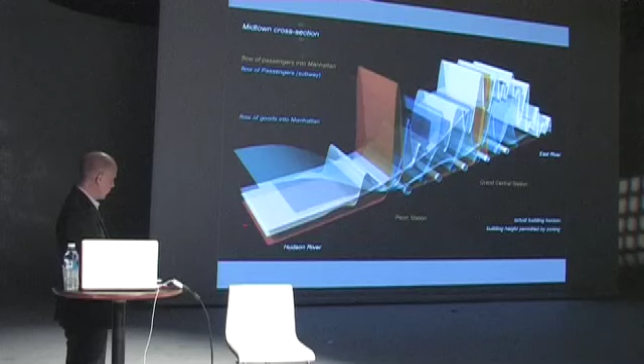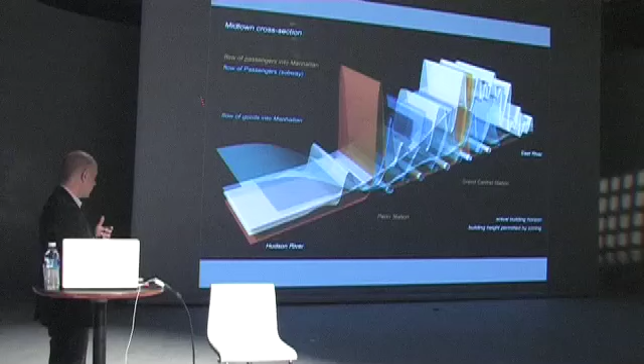Today these piers are not there anymore, and we know that if you are looking at an area we have looked at ourselves, that is the Penn Station area and the Grand Central Station area, and then think about the connections between the city center and the relationship towards the river, then there are many problems today. I mean, many things that are now an obstacle in the city. Although maybe there is a wonderful garden, a park around the river right now, and it's actually healing itself up since the industrial era.

But still, for instance, when you think about the 100,000 people coming into Penn Station every day, and, for instance, in the night you want to go to Madison Square Garden, then it's boring when you come out of that building. It's not so lively. If you think of that in relation to Grand Central Station, then this is a far more integral site with much more programs and much more activities around this site.

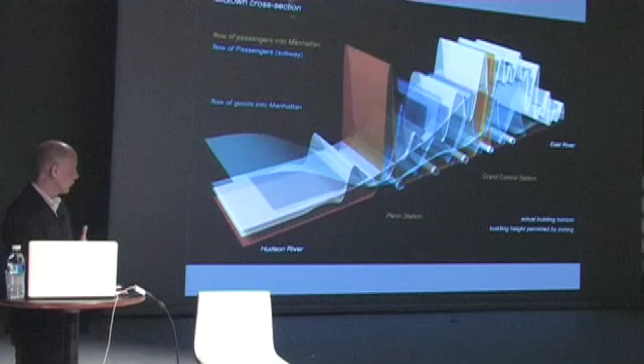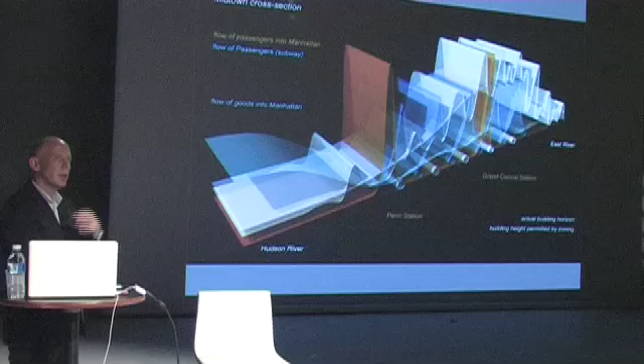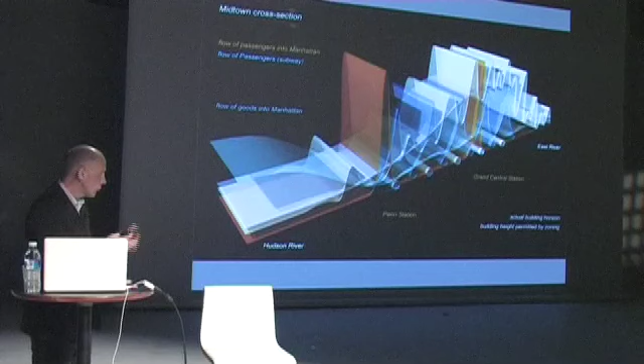But here, I'm not going to explain how we analyze this part of the city, as I promised. But I'd like to talk about how you can visualize information, how you can today structure information, and how you can rethink organizational principles. The organizational principle of Manhattan is a typical industrial, mechanical, organizational model, related to a history of architecture and urban planning that we have known for a long time. We know how we can work with the grid.

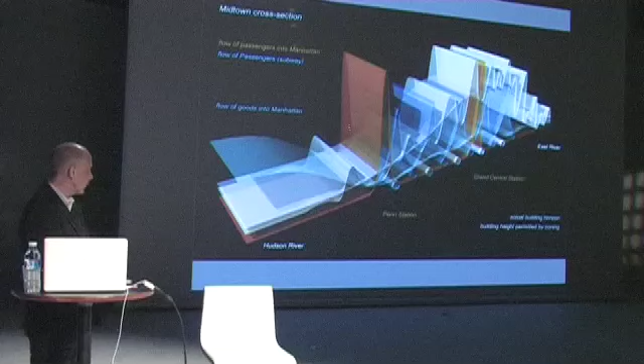So what is essential today is, what are the types of organizations we can work with today? What does it say to us when we see this type of information, and what can we do to it in a way that we can restructure it and redefine it in order to make this site more interesting, for instance.

Anyway, we have been for many years activating ourselves towards the idea of the parametric, although we have already been working on the parametric design method for maybe close to 10 years or even longer, but what we have learned is that it is not so important to work only with the computer when it comes down to form making alone. And the parametric principles in design are not so fascinating where they are related to just producing forms alone.

That's what I'm saying. We are saying with UNStudio that if you look at how you bring information together, then it's most important that you do that in a way whereby you make sure that the information is crossed and combined, and that you can suddenly discover things in how you combine information so that you make it more compact.

For instance, here on the site we were looking at the residents, the commuters, the tourists, and of course the people who really go to work at the location. How is it related to accessibility and publicness? How do all these user groups occupy the site in time? And not only in time in the day, but also how they walk from one location to the other, how much time does it take? Also, we looked at all these user groups in relation to their infrastructure. What type of infrastructure do they use?

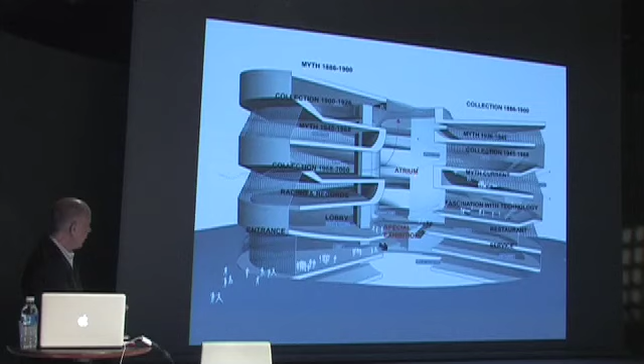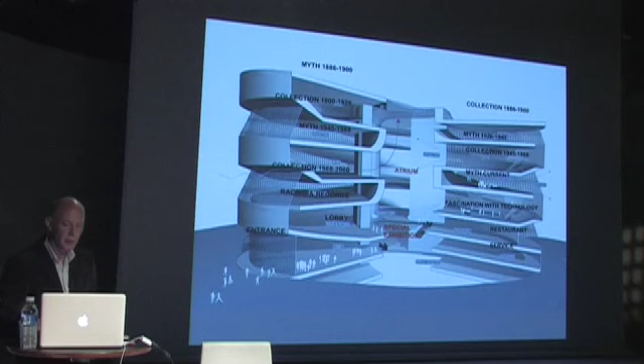And as you can see, the integral quality of the floor, held by the twist, is carrying the other floor, picking up in this layer again, and then carrying the next floor. So this idea of the continuous surface as an integral spatial organization, whereby the program, the infrastructure, and the installations are all integrated into one hybrid, seamless organization.

But as we know in architecture today, it is not so interesting anymore to make complex forms. As I said, it's not a form. It is the way you discipline the organizational qualities of how you bring the building together. Here you see the twist coming back four times in the organization, and we did that to be fast and quick on the one hand, because we had only one year to build this project, but also to make the building constructively very tight in the way we brought it together.

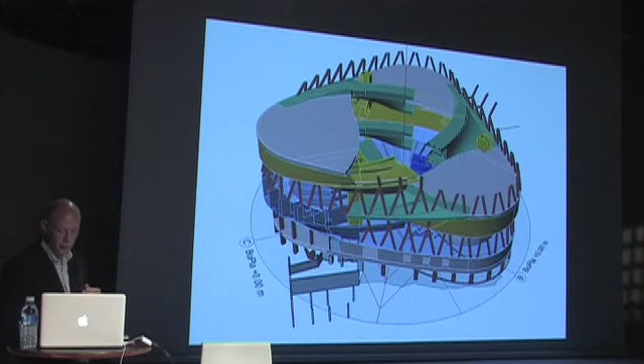So also for the casting techniques, we used similar materials to use the same method for the way how we then could speed up the project. So here you see again the internal view exhibitions like this, and these are the external views. So this is one spiral, and this is the other spiral.

And here you see the mathematical principle of the way how these twists are coming together. This is actually what we call a trefoil organization in mathematical principles, but the surfaces are called Seifert surfaces, and these Seifert surfaces are interesting to work with because they absorb an enormous amount of architectural qualities. So like I said, they can absorb the construction, they can absorb the way how you can direct the surface. So they talk in mathematics about orientable and non-orientable principles in these qualities of the way how this surface can guide you in the building.

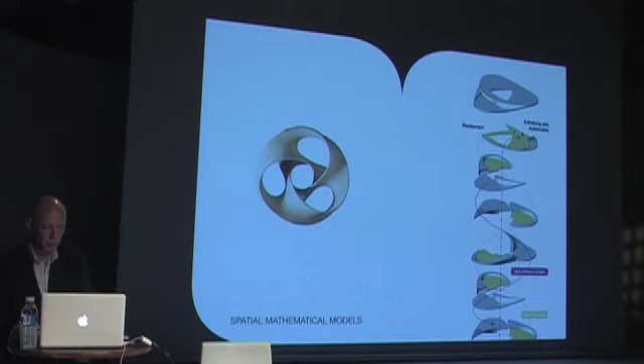One of the most important aspects when we designed this project in 2005 was that already in Germany there was an incredibly intense belief of the way how we had to think about the sustainable, or what we like to call the attainable aspects of the building. This is a smoke detector, so if there is a fire in the building, then this smoke detector can suck out the smoke in close to 5 to 10 minutes out of the building.

So that means that whenever you have a fire, you don't really have to have any compartmentalization within the building, but you can suck the smoke out of the building in a tornado-like way, because it twists itself up the building and then it sucks itself out of the building. So this is a real technological intervention in the way how we could make the building as open as possible.

And the advantage of this was that it could produce a building with 15% less materials. So we didn't have to do all the glass walls in the building for each floor. We didn't have to do all the compartmentalizations, not only between the exhibition spaces, but also between the utility spaces.

So also with this we could introduce not only less space and materials, but also we could reduce the cost. Because at the time when we worked on the Mercedes-Benz building, everyone was thinking that Mercedes had a lot of money, but they had a very critical budget.

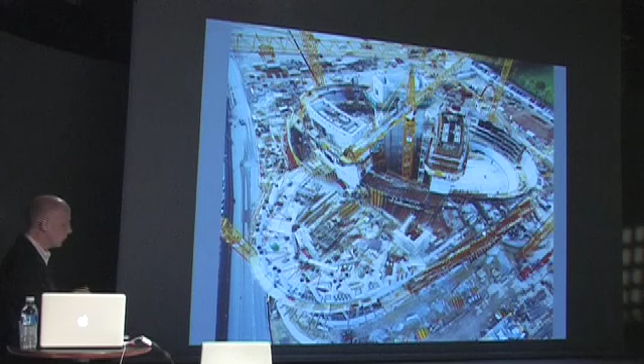Well, this is the building site. You see how exciting. This is my favorite picture. And here you see now the project in its full finish. And it's really weird to walk around this building, because it's almost like if you walk in a time machine. You start with the history of the car, and then you walk down, and then it's like if you walk towards the future. But there are two helixes, so you don't know sometimes where other people are.

So you think, oh gosh, why have I not been there? And why is that person up there, and I've not been there either? So you are in a kind of constant labyrinthian feeling when you are walking in this building. So that creates almost a contemporary spatial organizational quality, like we know today, that we can be in so many times at the same time.

When you are on your phone or mailing your friend, we can be in so many times, and this building is representing that idea that you can be many times in the same time. So it's not an Einsteinian time anymore that we believe in when we think about contemporary space. A lot of architects today like to talk about space, and we too, but it is so important to rethink the contemporary condition of space, if you compare it to the Giedion idea of space-time, which we all know about.

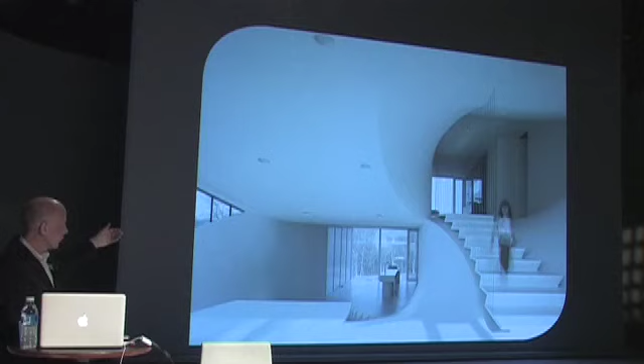And here also the whole idea of the transformative quality of the project comes together. You have an equipotential grid at the end of the house, and then slowly it turns into this softer geometry. So it transforms from the harder geometry towards the softer geometry, and it becomes more a connection towards the landscape. Also this part of the house, where the infrastructure of the house is introduced, people can communicate with each other.

Here suddenly the house becomes the place where people meet, where they can enjoy to see each other in the morning, when you come out of your sleeping room, or when you've been in the bathroom, or when you've been in the kitchen.

So geometry and the way how we play with the organization of the house, in this case or any project, is not so much related to the way how you shape it, but it's more how it generates activities, how it generates a particular kind of programmatic, or personal, or human, semi-private, semi-public qualities.

So maybe some of these ideas are then exported towards the outside, like for instance in this facade. This is also an equipotential grid, and then slowly it moves and transforms towards a more articulated facade. This is a laboratorium building in Groningen, whereby the color is guiding you from floor to floor, and each floor has another color, so you can have wayfinding within the organization of the building.

So the colors refer to the way how you can find your laboratorium within this building. But as you can see, it opens itself up in the corner, so that sometimes when the building is playing with that green, it flirts with the green, although it's not green yet. We have to wait a bit, but it can flirt a bit with the green in its surroundings.

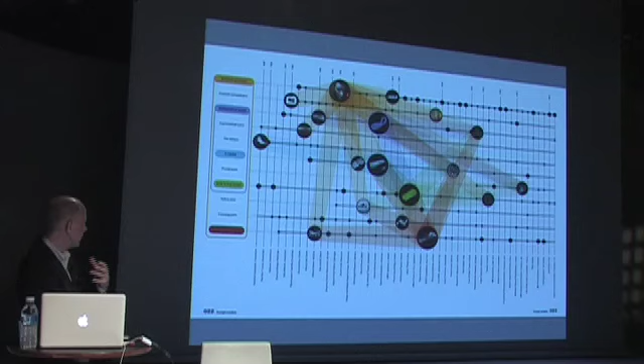And then you have these different types, like this box to blob idea. We've also sometimes worked with mathematical models, like you know from the Mercedes-Benz, but also from the Möbius house, or the way we worked with what we call the V-shafts, that meander between the deep planning strategy, as I explained a bit in the beginning - the way how we inform our projects, and how we can be highly inclusive with these forms.

So these ideas are now coming back much more in the latest work. This is a project, I'm not going to fully explain it to you, but it is about a moiré effect. It is a project again in Korea. The house you saw before was in upstate New York. I'm not going to explain why.

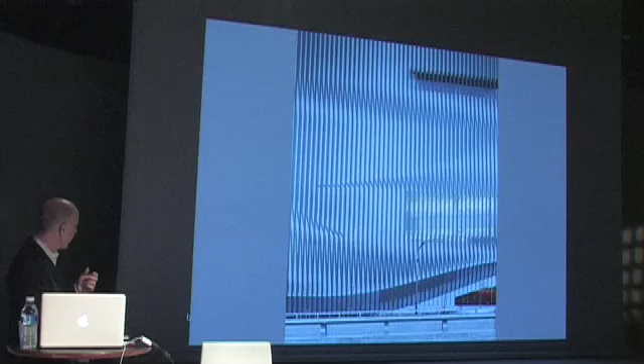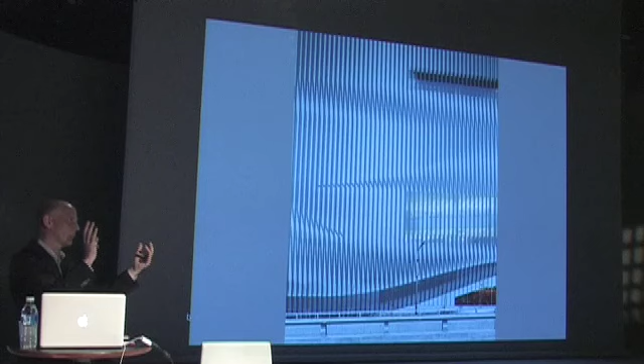But the whole idea here is the double facade, which creates constant changing multiple effects, whereby it's almost as if the facade has a plastic sculptural effect, changing because of its moiré effect. There are two layers over each other, constantly generating another graphical spatial organization. You can see it here in detail. These are steel and aluminium profiles, and these are glass elements generating that double effect.

It's very spectacular when you come into the building. It's almost like when you come into the project, you think first it is 4 floors, and then later, oh gosh, it's a building of 20 floors, but if you count very slowly, you discover there are only 10 floors. So this idea of the moiré effect, what you see on the outside, is also found on the inside. So it's not only a graphic tool we work with, but also a highly spatial organizational principle that generates constant scale blurring.

And this is our other belief. When we work with this idea of the transformative in architecture, so that you move from a fixed geometrical element towards a looser geometrical element, what happens is you create a space that is far more intense than a space that is very 2.5 dimensional. This is not a purely perspectival space. It is kaleidoscopic and highly transformative. It creates constantly this idea of the non-existence of a proper scale related to the many structures that come together.

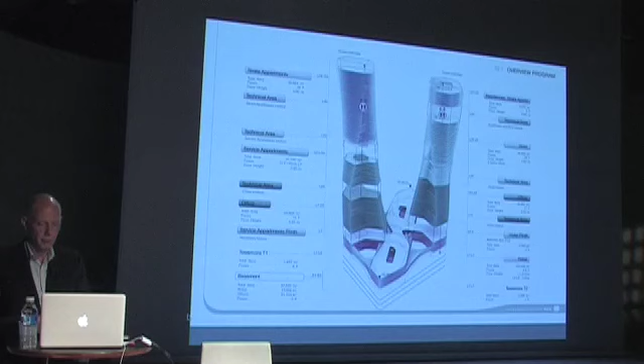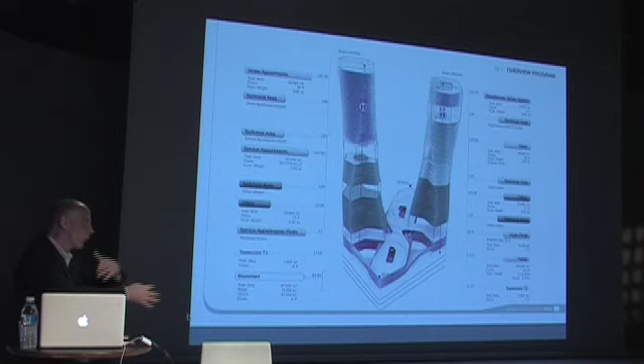This bridge could not be found in Amsterdam, for instance. But talking about this project in Hangzhou, it's quite amazing today that clients and cities, especially in Asia, ask more for urban sustainability, like everything could be activated within one place almost over the whole week. You could stay in one location almost for a week, so you don't have to use so much infrastructure and energy for the city, and people create a little bit more liveliness on the location. A little bit like what I said about Grand Central Station, with all its program around, a place where people could stay.

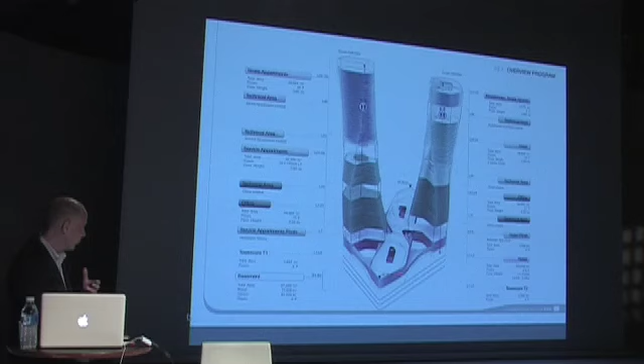You don't have to travel. If you have a city-within-the-city project, this is more or less a city. It's close to 500,000 square meters with offices, residences, hotel, shopping to cultural activities, all combined into one program.

Today, talking about the new understanding of our profession, it's so important to think also about a form of quickness. We don't want to promote commercial quickness, because we never liked quickness in the way clients say to us, can you design this project for us in a year's time, like with Mercedes? It was one to one and a half years that we had to design it, and we could build it only in one year as well.

This project also needs to be built very fast, but what we have learned is that a certain form of concentrated quickness is highly fascinating. It's like how we make art today, maybe. We don't paint paintings for 4 years like in the 16th or 15th century anymore. We paint them a little bit faster. In architecture it's the same.

We think we can become bolder in how we design these projects. With our programs today, we can be so fast that sometimes in the morning we can do these variants where everything is checked, even sometimes the construction. You check the program, the infrastructure, the internal organization, the urban landscape. The whole idea is not about two towers, it's all about one project whereby you make a cut, an opening slot within the building, more like a cave into the building, and then test it out in all these different variants.

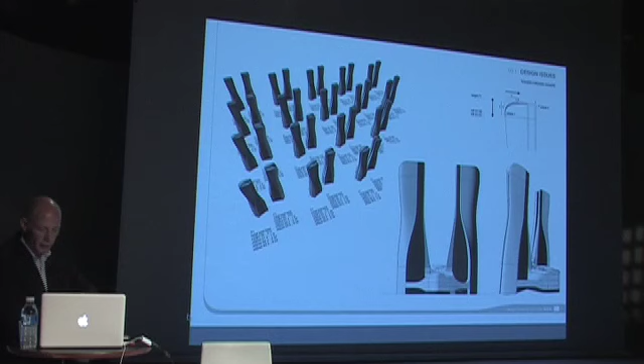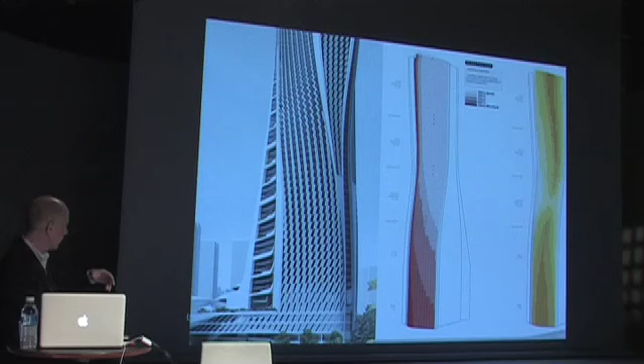And then, of course, the whole idea of the sustainable open facade on the north side and more closed down on the south side is tested in this project.

I promise not to go into all the details here, but the building is all about the construction and the shafts and how you have to stack all the programs on top of each other. For that you need another column system than one that is very linear. For housing you need another column system than for offices, or for a larger hotel program like an auditorium. That's why we came to a highly inclusive constructive system, a flexible system for this project.

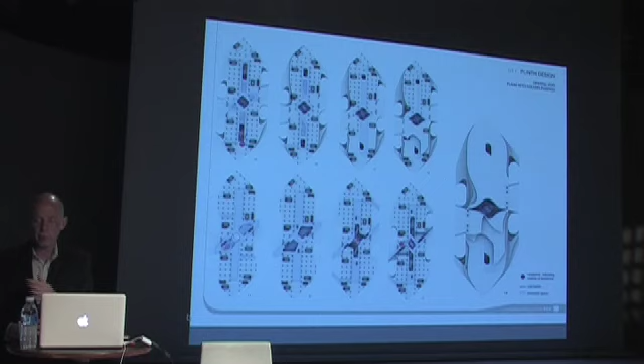There's also a latest need from many clients of us, even public clients, who say please don't make an office building anymore that cannot be turned into housing. It needs to be turned into housing.

So from the large scale, I'd like to explain to the small scale. We sometimes, over the last years, do many pavilions too. They become a testing ground, or maybe I'd like to say they become our small paintings. We just do them very quickly in order to test spatial ideas, like how the idea of light can come into a room.

This was a project, an installation, dealing with the idea of the holiday home. We argued, and maybe that's also related to myself, because I sometimes need this form of escapism to go out a little. When you have quite an intensive life, you like to be sometimes in another place, to enjoy yourself a few weeks in the year where you can come to yourself, concentrate and meditate on your ideas, like so many others have always done, having a dacha or a holiday home where you can just enjoy your time.

But my argument was, why can we not bring the holiday home? Why can we not bring the holiday home to our house? Why can we not bring the holiday home or the place to go out to ourselves? And this is all about that. This is a place where you can really enjoy yourself to be out.

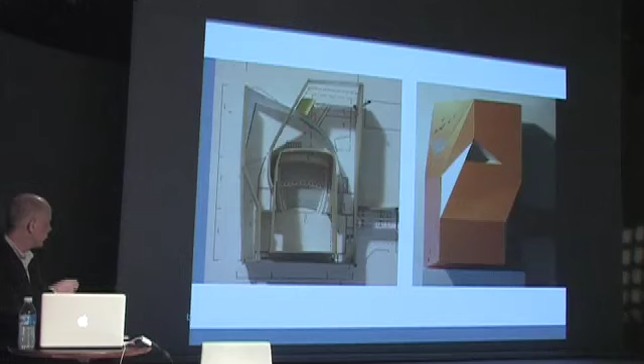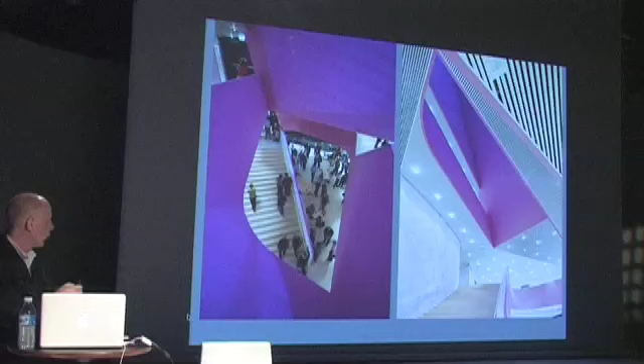So this is a theater with a foyer that is going up because the site is very tight. It goes vertically up. And you can see here that the whole idea of the kaleidoscopic on the outside, which represents the way the theater is playing with the idea of the many facets of the reality of the theater, is also brought to the inside. And again, you can see that the idea of the equal potentialness of certain angles is coming back also in the acoustic qualities we wanted to introduce in the theater.

And there are many things we introduced here. We made the theater very compact so that you could be very close to the stage. Like you have a little bit here, that it is very compact. And that also when you would sit up the balcony, the acoustic quality of the walls is bringing the sounds very high up. So we did everything with these acoustic panels in here, you can see that here, to guide the sound in many ways.

And you know, today again, they have wonderful programs for that. It's called auralizations, whereby you can test these ideas.

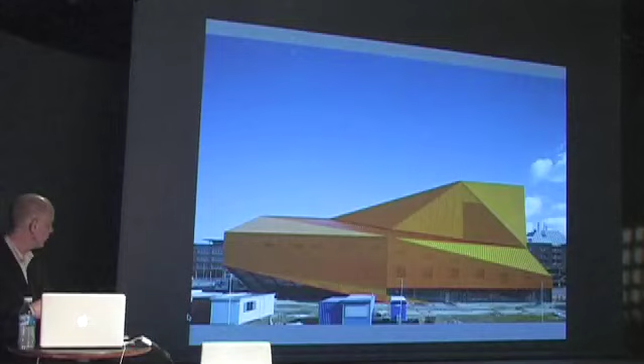But you have to see the building by the light, because you can see it here a little bit. So if the light is moving onto the building differently, then constantly it changes in color. So that was also another argument we made, that the building is constantly changing in color. So it's not absorbing one color.

It's having two layers with a yellow, sometimes an orange quality, and then with the light it turns suddenly in another color. And this play with many realities of the outside of the building refers back to the many realities of the world of the theater inside the building.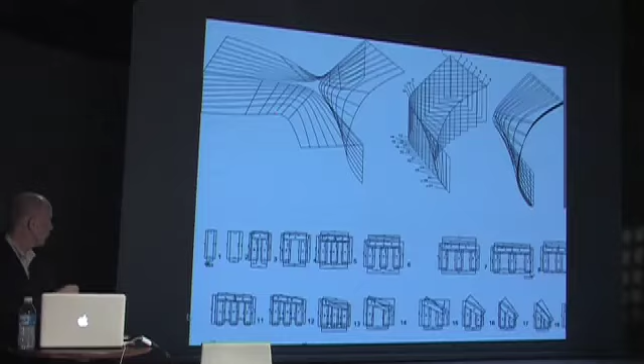So this is another pavilion we did for the Venice Biennale a few years ago, with a similar constant interest of how we can change surfaces and how we can direct them and build them in such a way that they can be equalized and be producible. And then with, of course, CNC cutting, with the latest techniques, they can be so made that these surfaces can become very smooth.

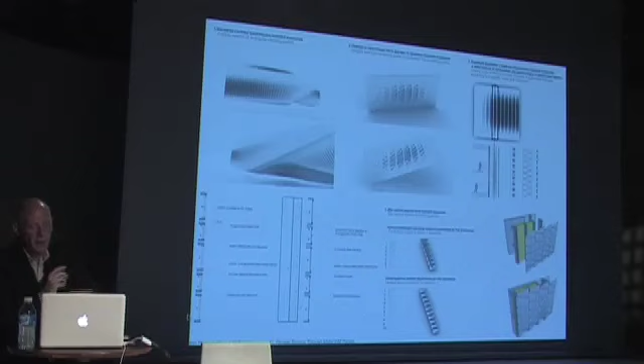And then sometimes we use these ideas, similarly like this dance theater in St. Petersburg, in such a way that we have here around, I don't know how many, 17 panels, 17 different smaller panels, and then how they can generate again this facade that moves from the outside to the inside to create a continuous experience of going out when you are in the building.

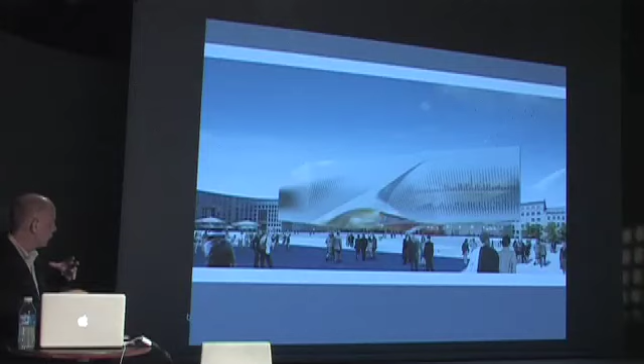So when you're on the outside of the project, it invites you to come to this building with many phases, I'd like to say. But then when you're inside, you're still outside. Or you could say when you're outside, you're maybe also inside. And that is a play with maybe a latest pavilion we played with, like you may be outside, but you're also inside.

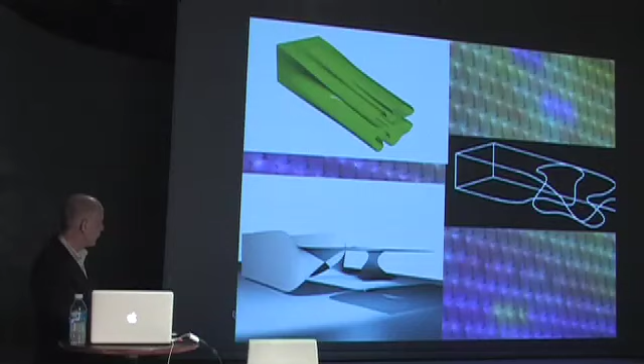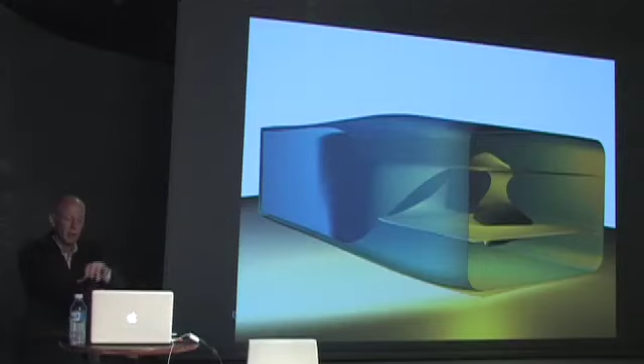So this idea that we can transform is what I'd like to emphasize a little better in this project of the music theater in Graz, whereby the box turns into this blob, but the wall turns into a floor. It holds itself up, and that's the nice thing also about the Möbius structure, like we did in the Möbius house, where the mathematical model supports itself.

So what can they learn? And our argument was that it was important that this building would teach you something when you come into it. It is almost like if you go to the theater, then you can listen to music. But if you go here into the foyer space or the entrance area, then you can look at music. So the idea was that you would look in the space towards each other, see each other up there, see who enters the building, and as a student how you come up.

But the nice thing about this project is that it's not the building that is nice, but the way it is used. The public can also use it at certain moments of the month when there are performances given by the students. Then the public can come, and the whole building is suddenly very lively, with a lot of people from Graz coming to this theater.

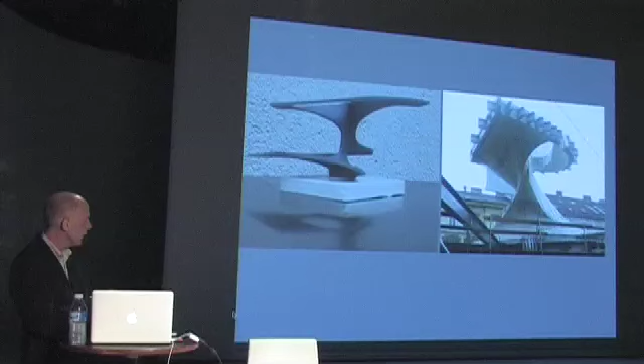But this project carries its floors in the central area in, again, a twist-like organization. You can see here the construction of that is so built that the concrete was not poured down, but the concrete was pushed up in order to make no gravel edges on the edges of the concrete. So again, here the production of the architecture, the way how we brought this building together, was one of the most interesting aspects of how this all came together.